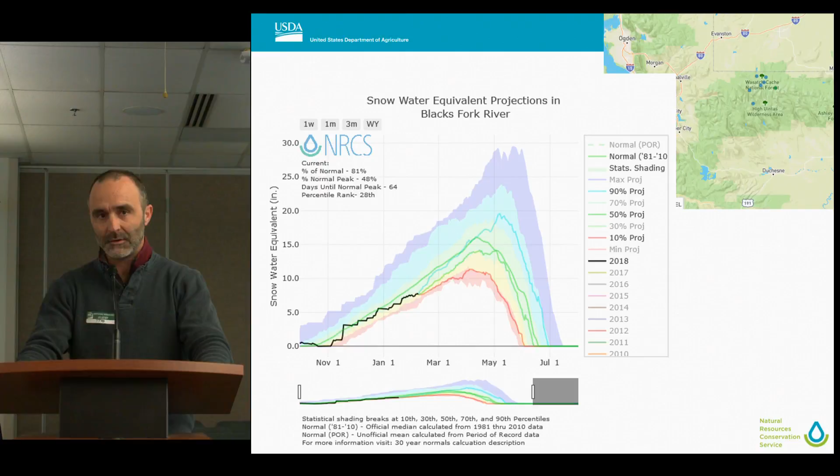We're getting good snow up there from the storms coming in, but they're just not reaching down into Utah. So a large part of that basin doing well is due to those Wyoming sites. The Black Fork Junction, or Blacks Fork River area, which is basically the north slope of the Uintas, is at about 81%, and that stands about a 20% chance of reaching normal by April 1.

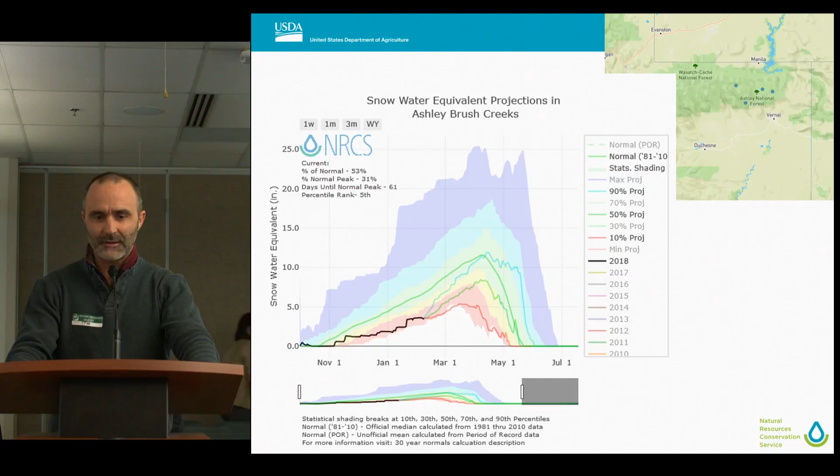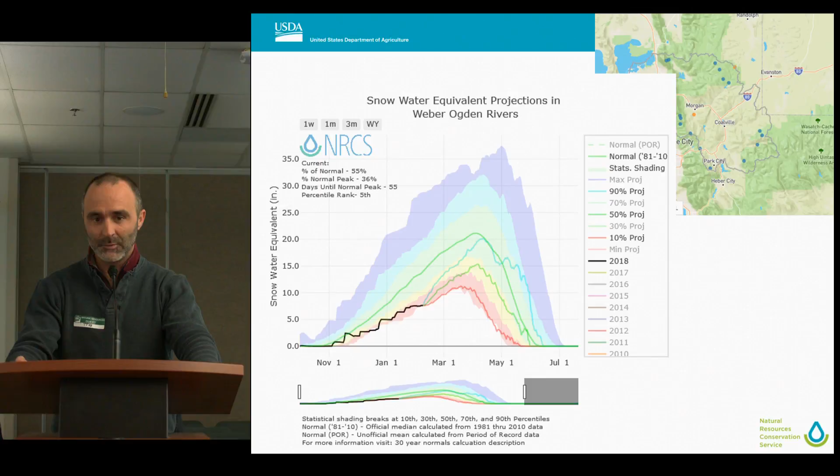Ashley Brush Creek, above Vernal on the east side of the Uintas, is doing much worse at closer to 53% of normal, with less than a 10% chance of reaching normal snowpack. As we go into the rest of these basins, you're going to see averaging 55% and lower, with basically a less than 10% chance of reaching normal snowpack. Weber Basin is sitting at 55%.

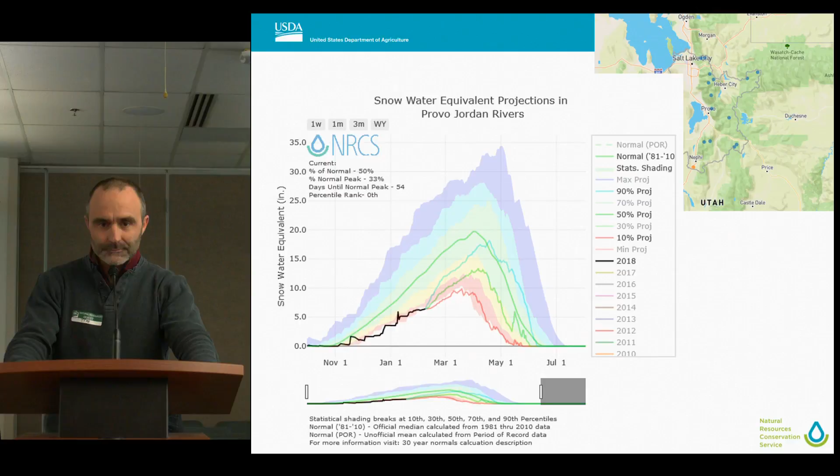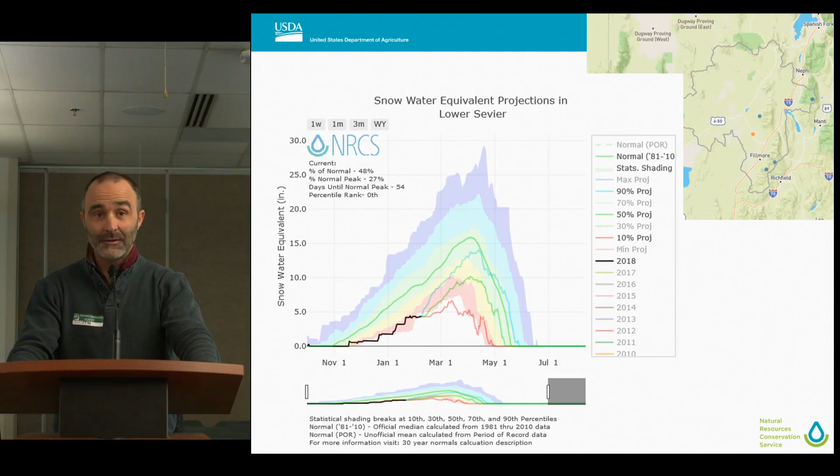The Tooele Valley is at 47%. Provo Jordan is at 50%. Duchesne River is 55%. Lower Sevier is at 48%. And now we start doing worse. We're going in at 36% for Upper Sevier. Beaver River's at 31%. San Pitch River is at 40%.

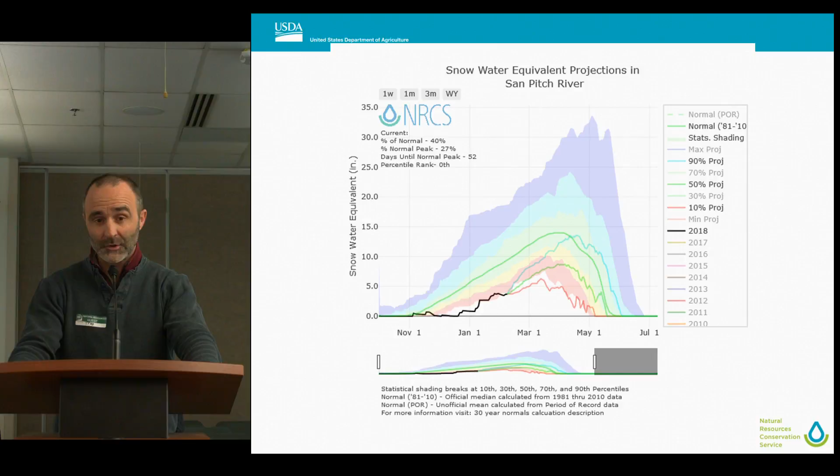36% for Price San Rafael River Basin. Dirty Devil's at 48%. Southeastern is at 37%. Escalante is at 32%. And the Southwest is at 32%.

So that basically sums up our snowpack. We're doing really poor as far as accumulating snowpack this year.

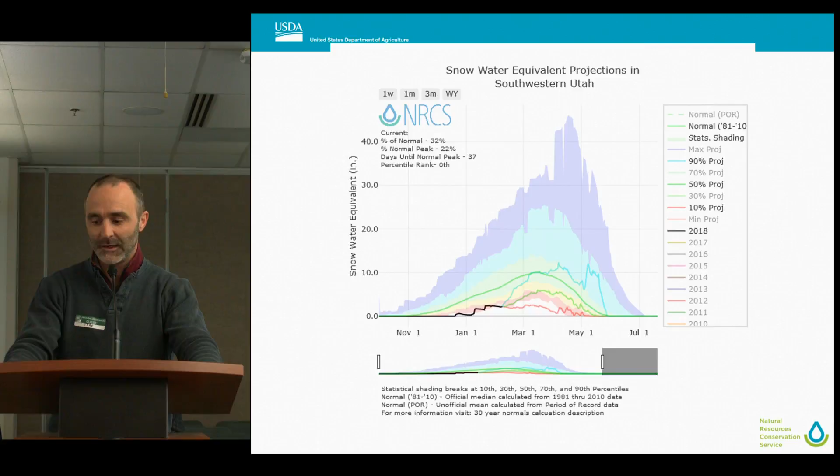January 1, we had some basins that were record low. When you look back at the snowpack records that we have, which go back to the 1920s, we saw some improvement even from just two storms in January, which brought it up from the worst snowpack to the second or third worst snowpack. It'll be interesting to see what happens for this month of February. The outward projection for the next 2 or 3 weeks is not good, so I anticipate that by March 1, we may again be breaking the record for the worst snowpack on record.

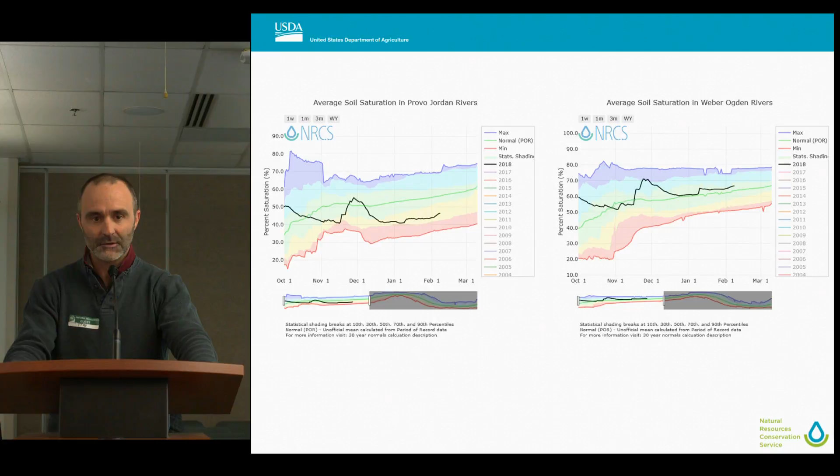So you're really looking at soil moisture down to 20 inches in the mountains. As we work our way down south, we start seeing soil moisture dropping a little bit in Provo and Weber. Provo is below average, and Weber's right along close to average. As we go further south in the Lower Sevier and the San Rafael, you see the soil moistures dropping there, and then the Upper Sevier and Dirty Devil. Dirty Devil's in record-breaking dry soils.

Now, why this is important is because with drier soils, that will make the runoff more inefficient. So a lot of the water, as it melts out, will be absorbed by soils on site until they get fully saturated, and then you'll start seeing runoff into the rivers and then into the reservoirs.

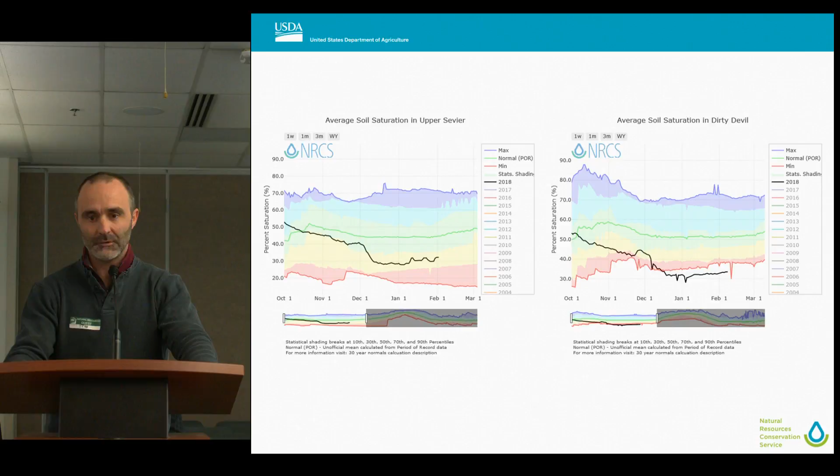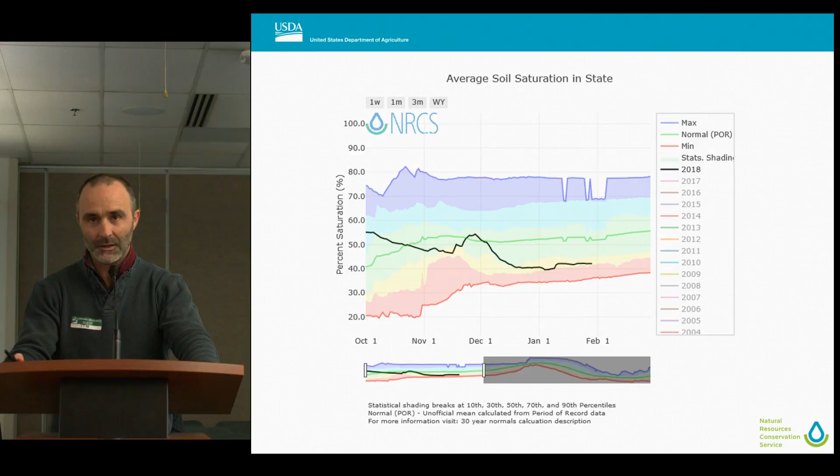Southwest and Escalante are both close to record-breaking dry soils down there too. So on average, for the state, soil moisture is below average. This is another nail in the coffin, so to say, where we can expect an inefficient runoff as well as a below average runoff for this water year.

So let's sum it up. The Bear River and the Uintas, the North Slope Uintas, those are our two decent basins. They're doing okay, at 81%. They still currently stand at about 20% chance of reaching a normal snowpack. When we work our way down south, the Weber, Duchesne, Provo, Lower Sevier range in between 50 to 55% of normal. For the rest of the basins down south, we're looking at 29 to 45% of normal.

So pretty much all these basins, aside from the Bear River and the Uintas, have a 10% chance or less of reaching a normal snowpack by April 1. Our forecast on February 1 up north, within the Bear and the North Slope, the forecasted flows are estimated between 55 to 88% of normal. Then we look at the mid-north, which includes the Weber, Duchesne, and Provo—those ranging typically from 50 to 70%. And the south is ranging pretty much from 30 to 50%.

There are some forecast points that are as low as 6%, and some ranging 60 to 70%. But on the whole, across the state of Utah, the river flow forecasts are all well below normal or average stream flows.

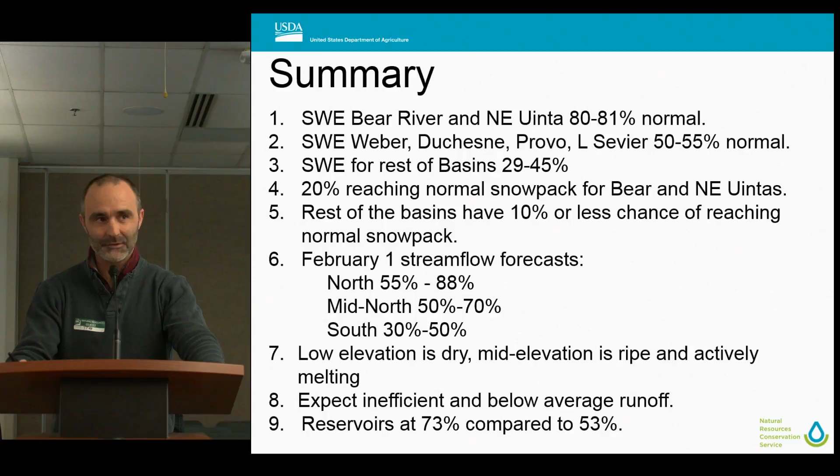So one would ask, where's the snow? It's not here in Utah. It's mainly up in Montana and Wyoming, north of us. That's all I got. I'm sorry I can't bring better news.

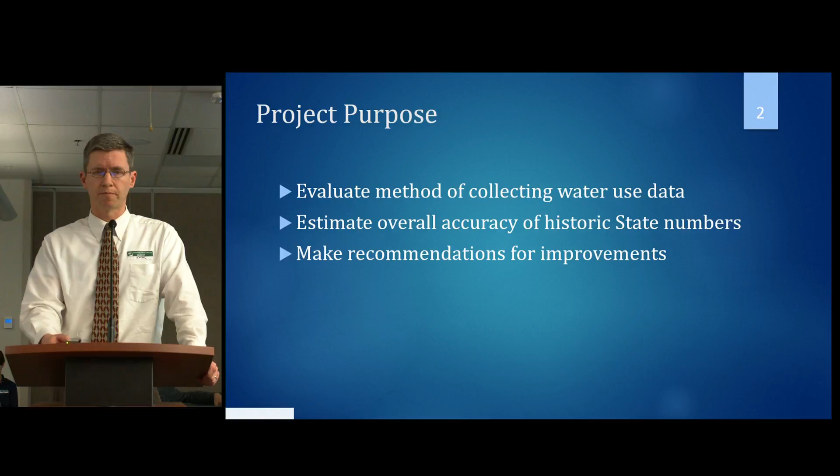In terms of how we attacked this task, we did a couple of different things. First, we spent quite a bit of time doing interviews with the Division of Water Resources staff and also the Division of Water Rights staff. We also got out and did some interviews with some of the water providers that are turning in data for this data collection process. Once we had that, we looked at your water use database and all available documentation.

Last, we went out and did a detailed survey of different entities. We wanted to capture both a broad range of use as we could, but then also get in deep in a couple of areas. To do that, we looked at 3 large water districts: Jordan Valley, Weber Basin, and Metropolitan Water District of Salt Lake and Sandy. Those 3 districts comprise about 50% of the water use in the state. So by looking at those 3, we're able to get a pretty broad indication of accuracy.

But then we also wanted to look at some smaller retail water providers and really get into the nitty-gritty of how the data was being collected. One of the questions that has come up is, why should we believe your numbers, Bowen Collins, Hansen Allen Luce, any more than the Division of Water Resources?

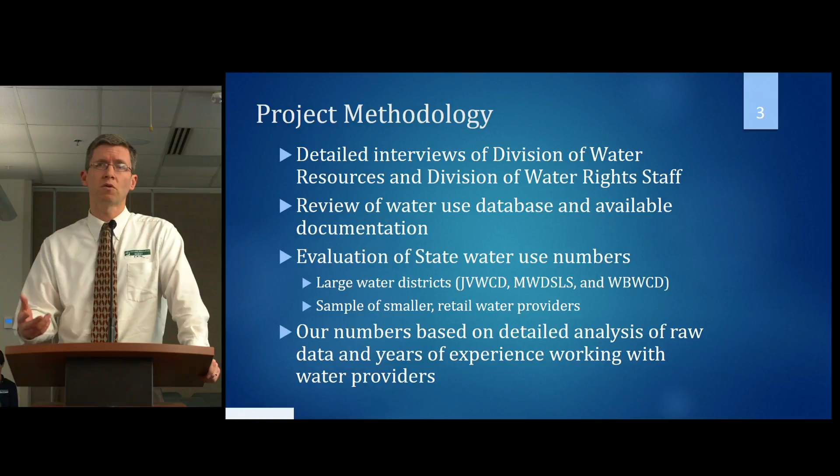So with that in mind, what did we find? Hopefully we have a little bit of good news here, maybe a little more than Troy was able to bring you. First of all, potable water use data is quite accurate, and it is getting better. That is where we spend a lot of our time, and that's where Water Resources spends a lot of their time. What we found is they've done a really good job at getting that information and getting accurate numbers. We'll look at that in just a little more detail.

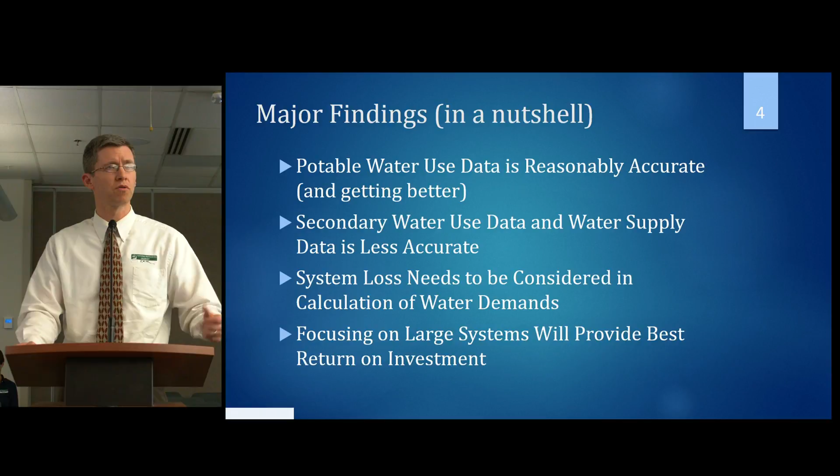But in a nutshell, the other things that we found: secondary water use and water supply data is less accurate, and there are some reasons for that that we'll talk about, and some things that we can do to improve that. We also found that system loss needs to be considered when you're calculating your water demands, and we're recommending that you focus on the large systems to provide the best bang for your buck, or return on your investment, as you seek to understand water use patterns.

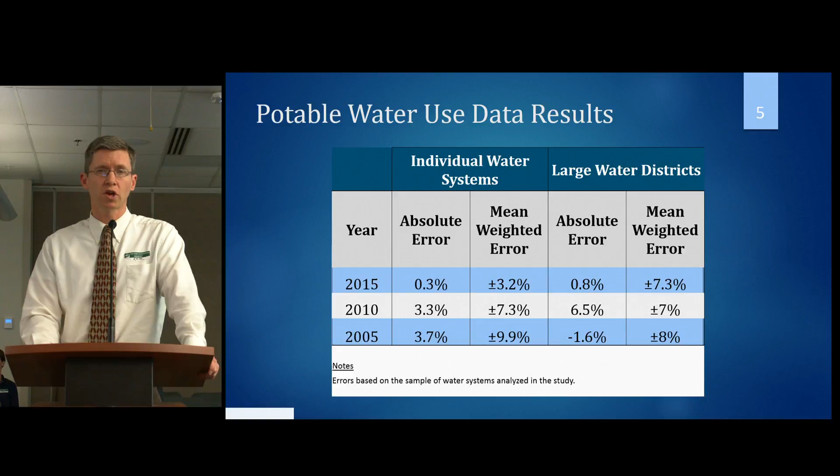You can see that it's also improved over time. From 2005 to 2015, we've generally seen a reduction, so those are getting better over time.

We identified in our report 17 different things that could be improved in the methodology from the 2015 process. As we looked at what's happened in the last two years since the audit, out of those 17, 7 have been completed already, 7 are in process, and only 3 remaining recommendations still needed to be started. So already since 2015, staff has started to make a number of improvements.

This slide, I think, is really illustrative of the effect of that. Basically what you see is a lot more systems reporting. Only 2 systems that we were able to identify had not reported in 2016. So really the process, even from 2015, is getting better and better.

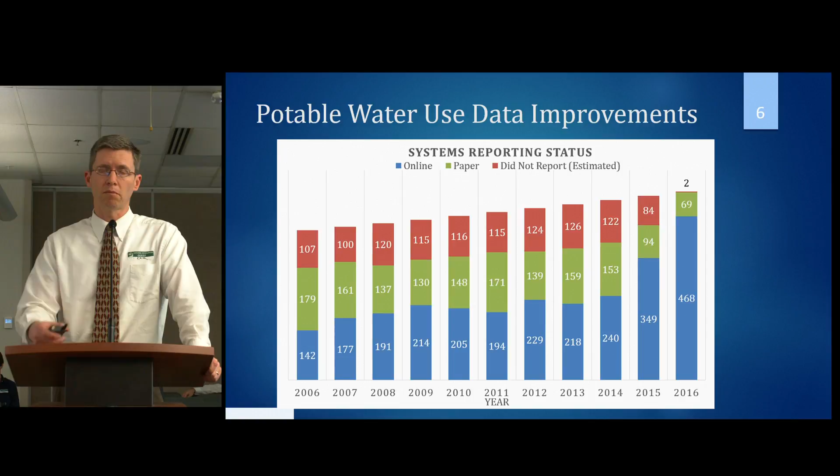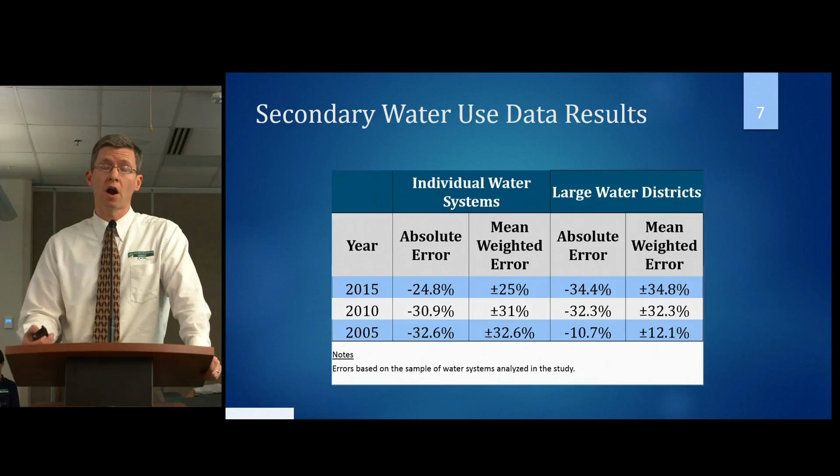On the secondary side, what we found is that we were not quite as accurate. In general, we're seeing an underestimation of what our numbers were showing in terms of secondary water use. There's a couple of reasons we think are contributing to this.

One is an oversimplification of lot size. In the 2015 draft, secondary was created by multiplying an estimated lot size by an estimated application rate. What we're seeing is that lot size was oversimplified, and we weren't getting accurate data relative to lot size. We also noticed an underestimation of application rates.

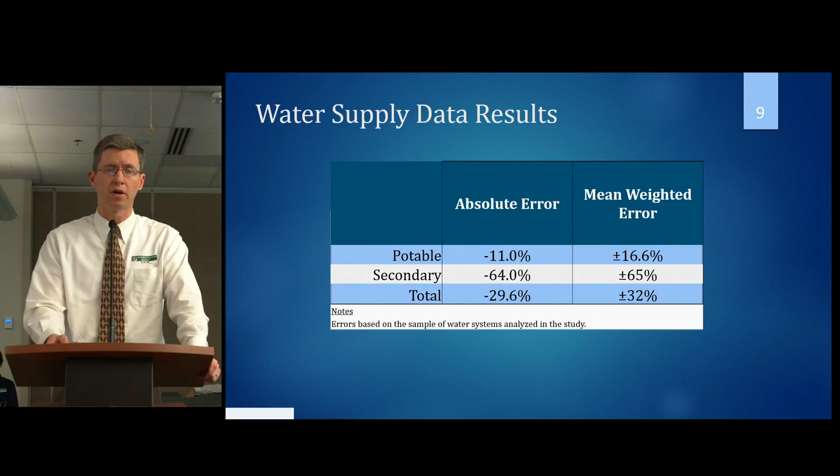So overall, in summary, potable water use numbers look great. Secondary and supply are a little bit underestimated.

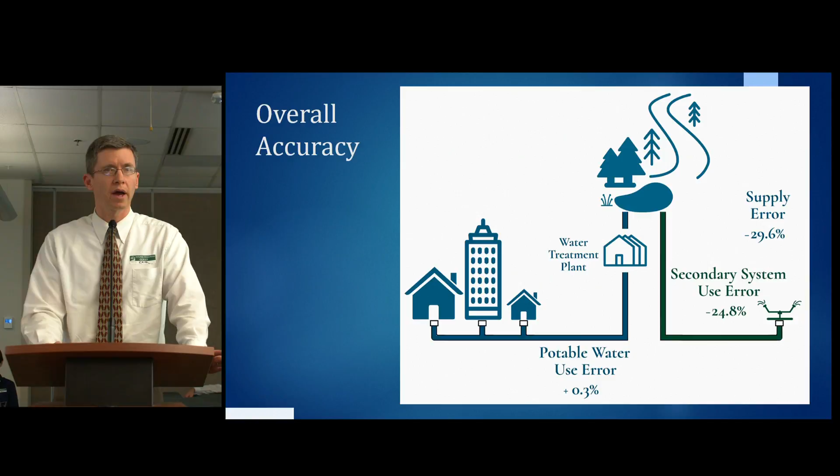One of the other conclusions we made was that system loss is something that has not historically been represented and needs to be represented. You are all familiar—you have a supply that goes to a house, and thus far our focus has been on metered use. What we're finding is that metered use only represents about 85% of total water consumption on average.

That's an average number—some systems can be much higher than that. We found systems up in the 30-plus percent range, but that represents leaks, unmetered use from things like fighting fires, construction water, and application to public properties that are sometimes unmetered.

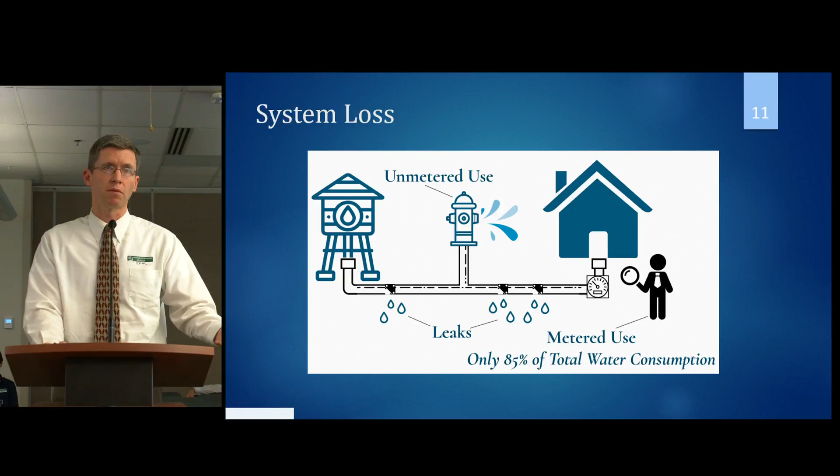So there's a difference, and that needs to be included. The last big conclusion we had was that there is definitely a difference between large and small systems in terms of your overall numbers. Large systems, in this case we've defined that as systems serving more than 5,000 people, you have 18% of your systems, just under 100 of the 500 systems in the state. Those result in 88% of the water use. The other 82% of the systems, the small systems scattered throughout the state, only result or are only responsible for about 12% of the water use.

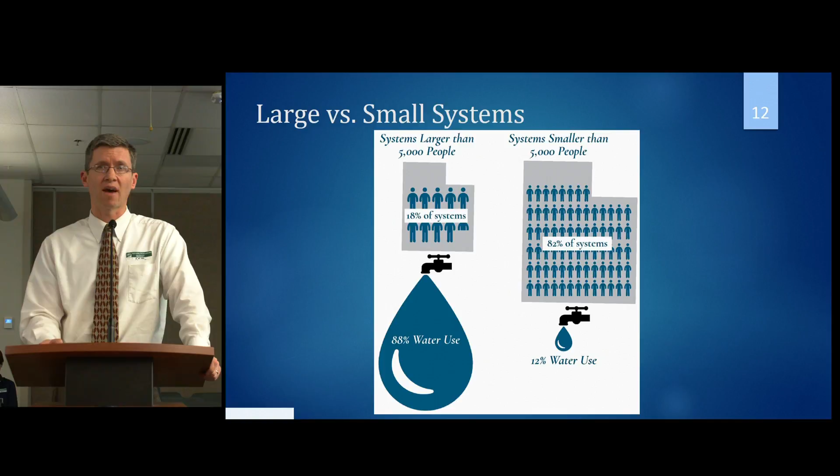And so as a result, if you want to focus on getting your numbers as accurate as possible, you need to make sure that those large systems are giving you good numbers. And the small systems, if there's a little bit of error in those, that's not going to have as big effect on the total number.

Okay, so to wrap up, what are our recommendations? Number one, continue your current trajectory of improvement in data collection. As mentioned, we've seen major steps forward since the 2015 audit. If you continue that direction, we think you're absolutely on the right path.

We'd recommend you add consideration of system losses into the calculation of demands. In the short term, we're recommending adding 15% to your current estimates. In the long term, we're recommending, and we recommended this to the legislature, that you require AWWA M36 water audits in the future so that systems have a little better idea of what their actual system loss is.

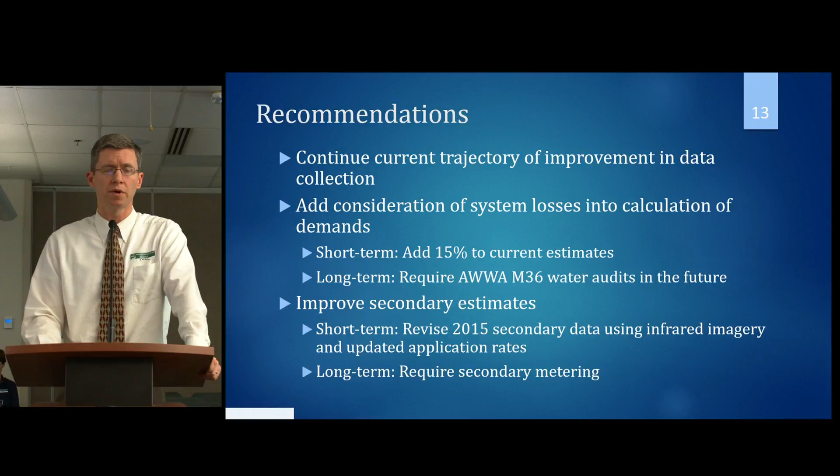In the long term, and this was really a big thing that the legislature wanted to talk about, was requiring secondary metering, at least for your larger systems, so that we have both better numbers and we also have some ability to encourage conservation.

And then the final recommendations for supply, we're recommending that you have your systems do a detailed supply analysis to provide to Water Resources so they can improve those numbers. And then focus your efforts on the large systems, especially those larger than 5,000 persons.

Last thing is we were asked to provide a recommendation regarding what baseline number we would use for future planning, and we're recommending the 2015 estimates of Water Resources with the few updates that we've identified here.

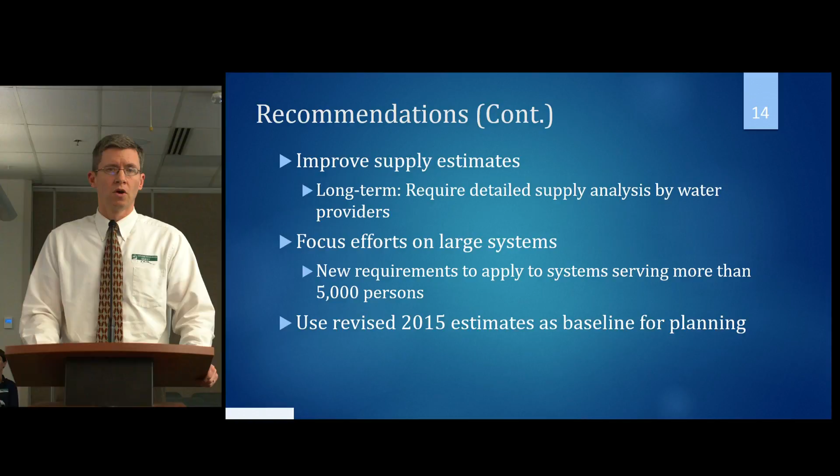And then this was for legislative actions. We did make these recommendations to the legislature: secondary metering, AWWA water audits, and supply evaluation plans, especially for those larger customers.

So with that, we'll open up to any questions.

I have one. Could you go back and maybe do a little bit more detail of what is required in an AWWA M36 audit? Sure. Either you want to take this one? I've been talking a lot. I'm Dr. Rob Sowby of Hansen, Allen and Luce, by the way.

AWWA has come up with a standard method for auditing water loss in systems. It includes calculation errors, thefts, apparent losses, fire flows that are unmetered, construction, etc. And that's a standard method that can be applied to any size water system. Many Utah water systems are already doing this. I know that Central Utah Water Conservancy District is already implementing this kind of audit, and that's something that we would recommend as a standard practice for, especially for large systems.

Okay, thank you. Essentially, you're just stepping through all of your different potential water uses, whether metered or unmetered, through a defined methodology to identify loss. Additional questions from the board?

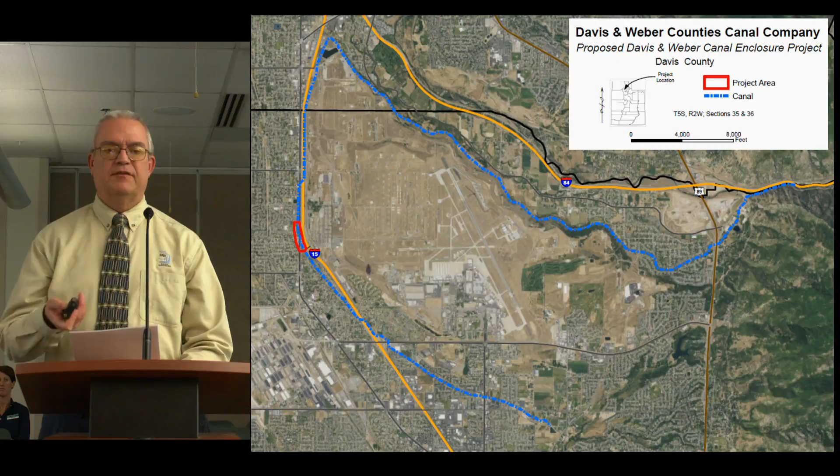The applicant plans to improve the remainder of the canal over the years as funding opportunities become available, and they have a long-term plan that breaks out specific sections, prioritized for further improvements. They're currently enclosing about a 950-foot section of the canal, shown on the map here. You can see where the off-ramp from the freeway is, and it's from that point up to where the canal goes under State Road 126.

They also have a WaterSMART grant application that will allow them to enclose another about 3,600 feet of canal this coming fall and winter. The applicant is before the board today to request financial assistance to enclose about 1,200 feet of the canal from where it goes underneath State Road 126 up to the parking lot you can see.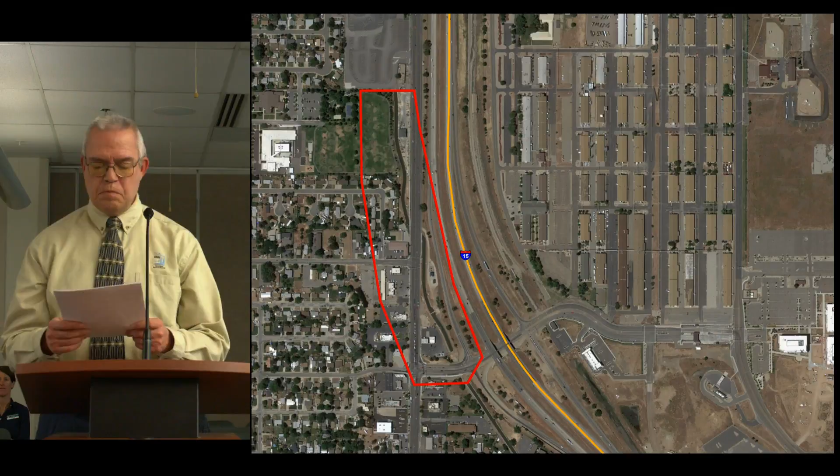The concrete liner in this section was installed in about the 1920s, and there's considerable deterioration occurring. You can see where a lot of the sections have been broken out, looking south towards State Highway 126. Here's a closer view of a couple of sections where the liner has failed.

The project benefits primarily include increased safety since it will be an enclosed canal, improved water quality because the garbage—you can see tumbleweeds and everything else in that picture—will be kept out, and conservation of over 300 acre-feet of water annually. It will also reduce the operation and maintenance cost a little for the company.

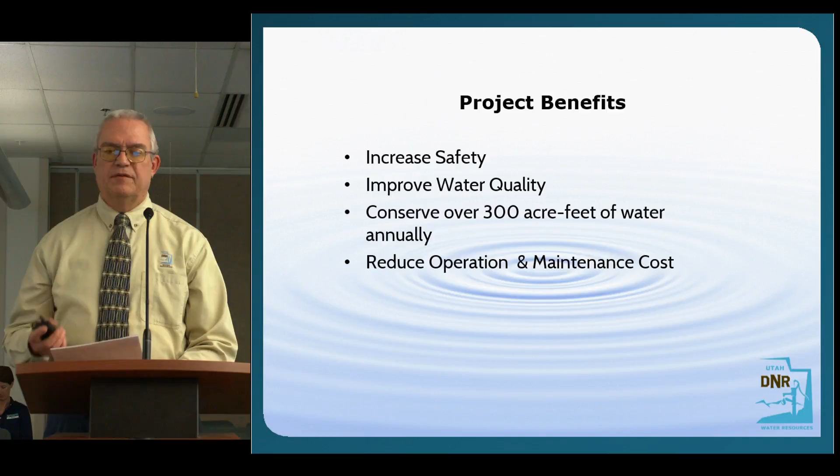The projected project cost is $1,325,000. They are getting some money from UDOT to help pay for the crossing underneath the highway. It's proposed that Water Resources authorize and commit at this time 73.6% of the project cost, up to $975,000, with the project purchased at 0% interest over approximately 20 years with annual payments of $48,800. Just an explanation about the terms—they're getting 0% interest because it's under $1 million, so it can come from the revolving construction fund.

And since it's mainly a safety issue, we're giving them an extended repayment period of 20 years. So that's just a short explanation on that.

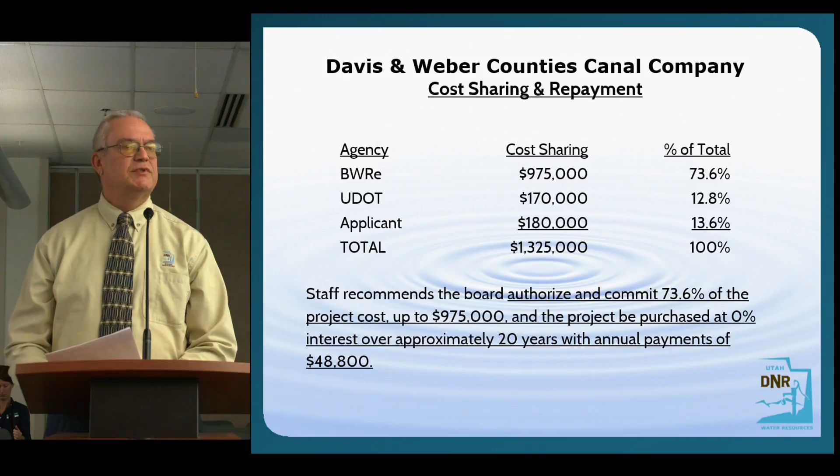The project is ready to start any day because when they put the bid out for that original 950 acre-foot improvement that's going on now, they also bid out this section in anticipation of the project. So they're ready to go. Mr. Chairman, members of the board, that's staff's report.

Thank you, Tom. Rick, Scott, Bryce, would you like to make comment on your proposal? Well, I think it's been explained very well. Tom's done a great job. We just appreciate the consideration of the board in this. It would really help us out in stretching our reserves for other projects. Thank you.

Okay, questions from the board? Motion is in order, Mr. Chairman. I'm ready to make that. I've had the opportunity to meet with this group and did a site review with staff on it as well. So I would make the recommendation that the board authorize and commit 73.6% of the project cost up to $975,000, and the project be purchased at 0% interest over approximately 20 years, with annual payments of $48,800.

Thank you for the motion. I'll second it. Steve Farrell makes a second to the motion. Any further discussion on the motion? If not, all in favor of the motion, say aye. Aye. Any opposed to the motion? Motion passes. Thank you, gentlemen. Thank you very much. Appreciate it.

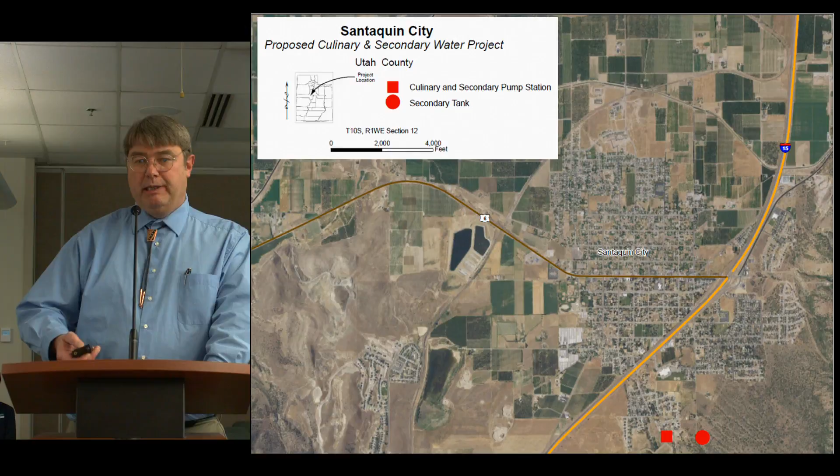They're going to share one building, but have separate pump stations on their own. There's a few pictures of their existing system. Here's a photograph, map of where they're proposing the pump station to go, again on the east side of the city, up on the hill. A new secondary water tank or reservoir will be up by one of their city culinary tanks.

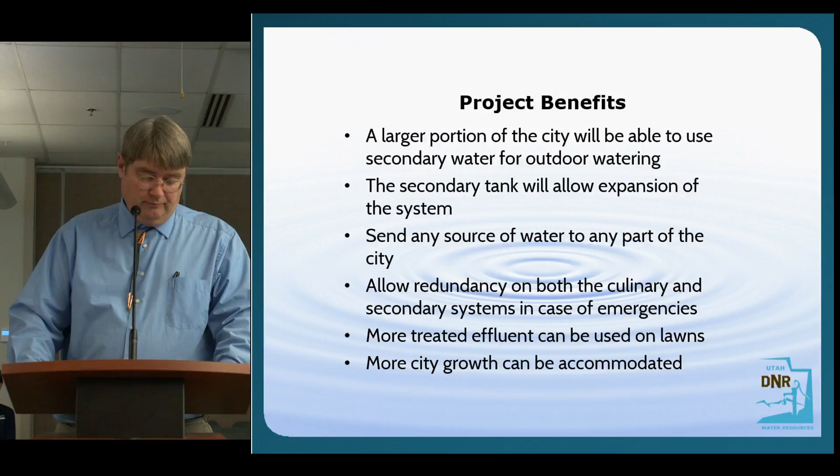As shown in the cost estimate, the cost is estimated to be about $4,048,000. As shown, the board is being requested to fund 85% of this project, or $3,441,000. Staff recommends the board authorize and commit 85% of the project cost, up to $3,441,000, and the bonded indebtedness be returned at 2% interest over 20 years with annual payments of approximately $223,000. The financial feasibility shows the city would be above the board's affordability guideline with this project.

And the city currently has fairly aggressive tiered culinary water rates, and the city is currently discussing putting tiered rates on the metered secondary water and lawn and garden system. And that is staff's report.

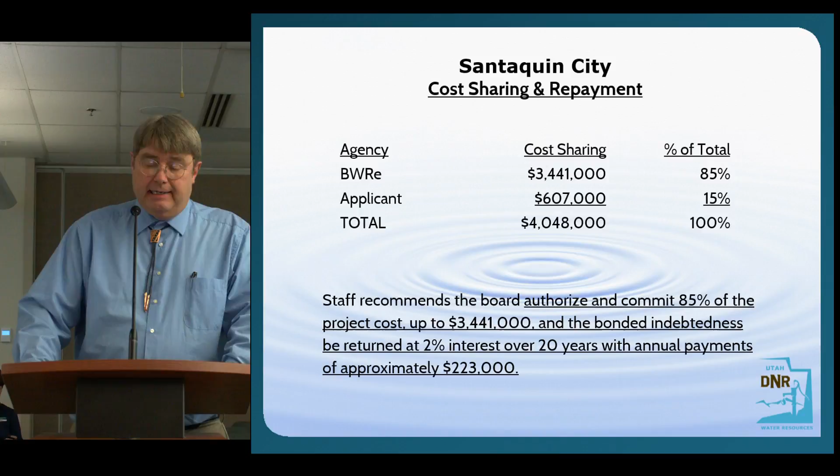Mr. Mayor or Mr. City Manager? I'd love to. Thank you for entertaining our project today. That water treatment plant project was a hard sell in Santaquin. The elected leaders went through a lot to get it done. It was a previous mayor and the council then, but we are so grateful for their efforts in doing that and being able to have this system that we have now and being able to use our treated effluent. We want to expand. The growth is coming south. Santaquin's seeing that growth, and we need to be prepared for it. And anyway, we thank you for your consideration.

Thank you. Questions from the board? Yes, Norm. Having been a city manager myself, I'm just a little curious as to how you think it's going to be received if you do start charging on a tiered basis for your secondary water. How's that going to fly?

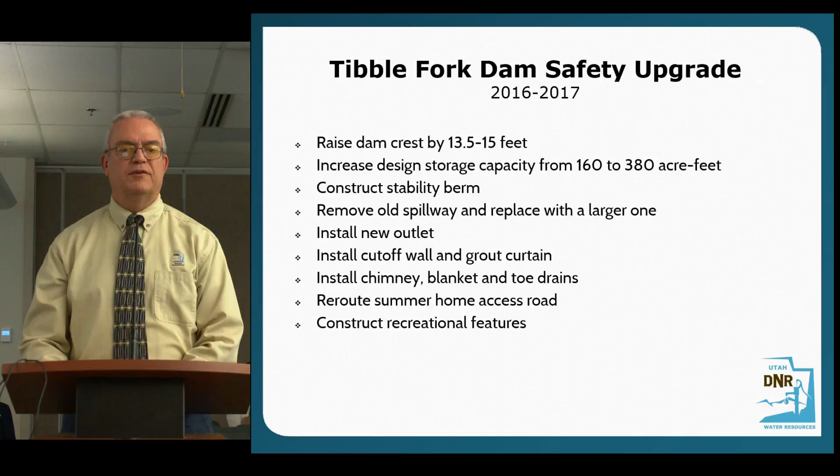Install chimney, blanket, and toe drains, reroute the summer home access road that used to run right across the crest, and construct some additional recreational features.

So the total project cost, this is just the construction cost sharing, was just about $8.3 million. NRCS put in 65% of that, plus 100% of the engineering, like Eric mentioned. We put in almost $1.851 million, and that was just for the dam safety features. It didn't include costs for any of the recreation, didn't include any of the costs of raising the crest, because we could only pay for the minimum standard upgrade on the existing facility.

So we ended up only paying about 22% of that total construction cost. And although it was available, the district did not utilize any of our loan funding for the project for their cost share.

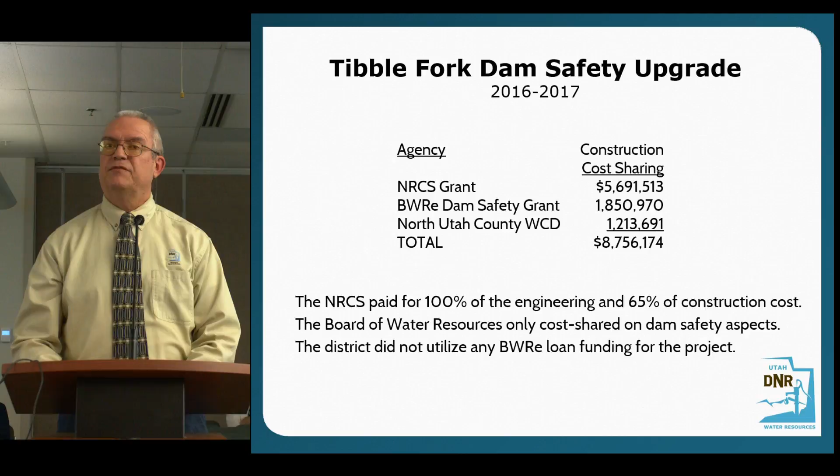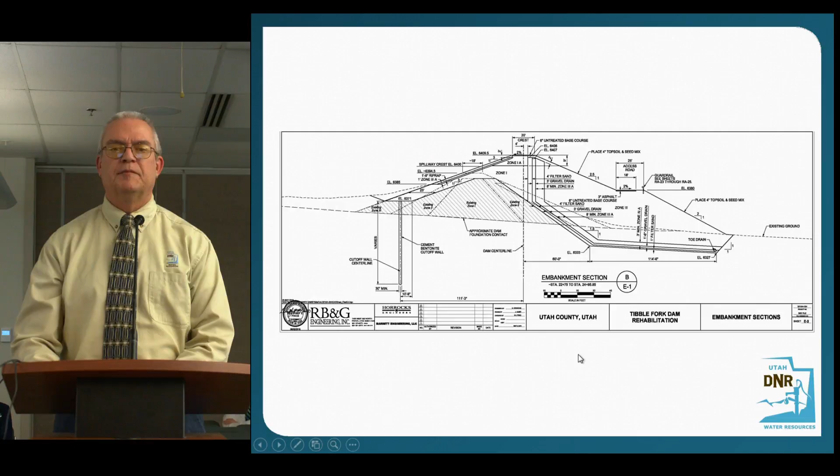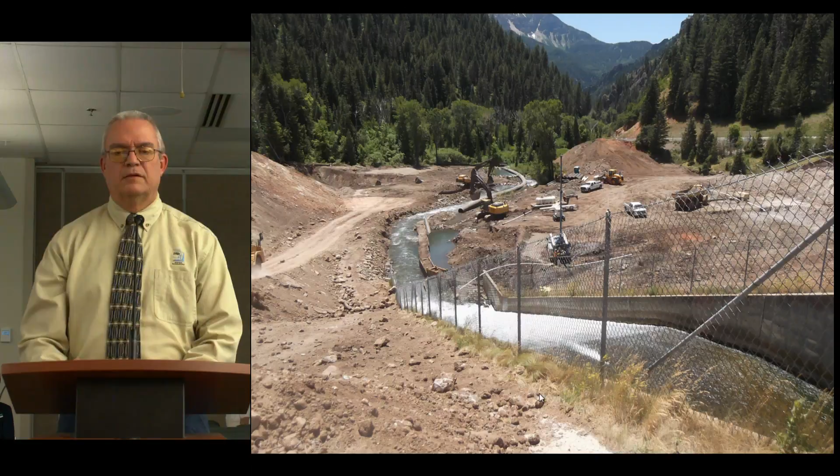So this is a shot of the original spillway. You can see they've already done some clearing and grubbing at the toe, and you can see it's an HDPE pipe that they fused together to hook onto the end of the spillway to control the flow while they did the work.

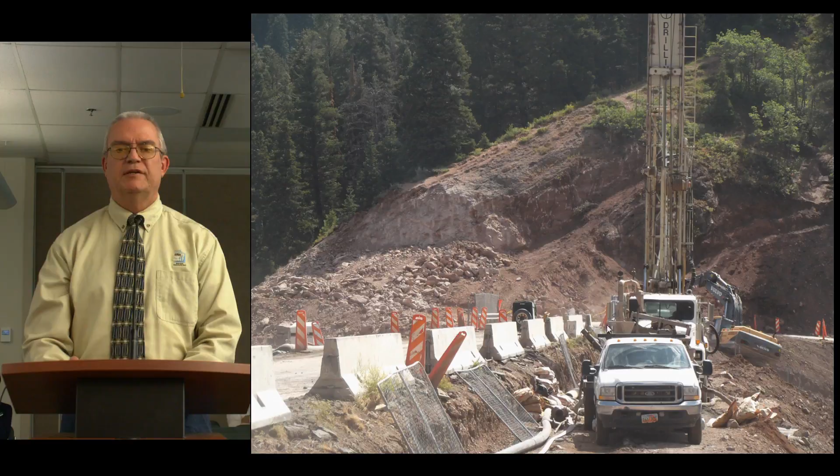First thing they had to do was put in dewatering wells so they could dry up the area so they could excavate down at the toe of the dam. So there's one of the drill rigs. They've already started clearing off the left abutment where they will put in the grout curtain.

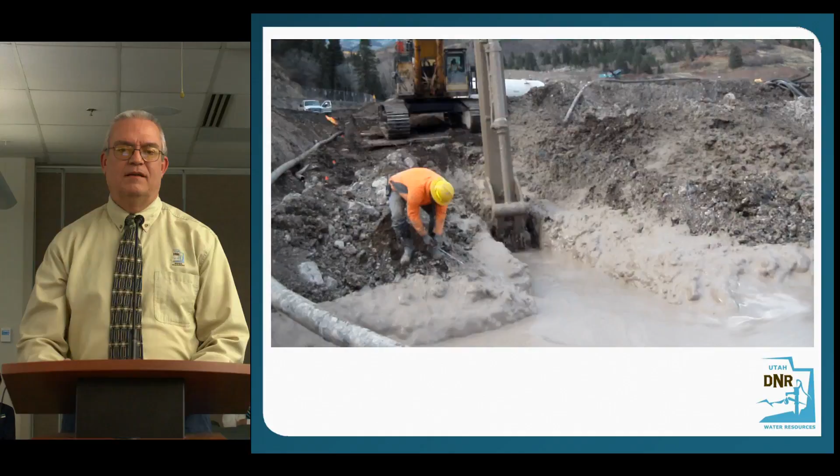So what he's throwing in is a weight, so you can measure the depth of the trench at that point. And it was probably only 30 to 40 feet deep at that point - they had passed the maximum point.

You can see all the teeth on the back of the bucket, because if they ran into something hard, they had to just work their way through it. And they did find some boulders and things they had to work through.

I don't think there's much left on that video.

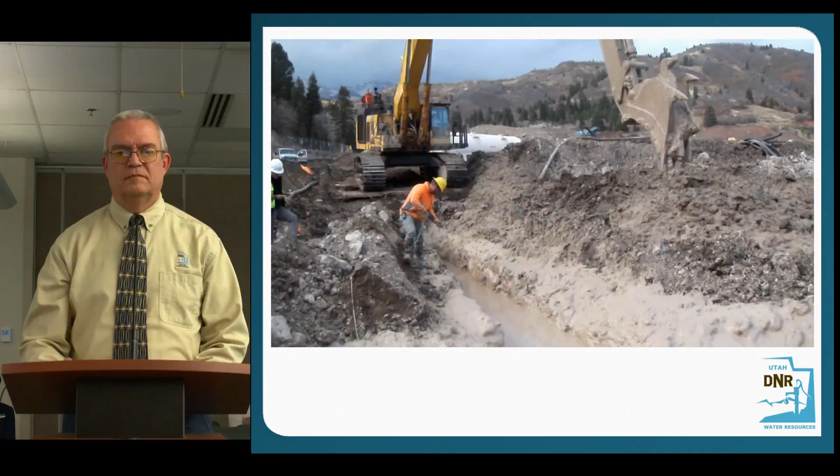This is the end of the trench where they started. You can see the excavator in the background, but it's already starting to set up. They actually went in after it was mostly set up and put in kind of a harder cap on it. It wasn't pure concrete, but it was harder than this.

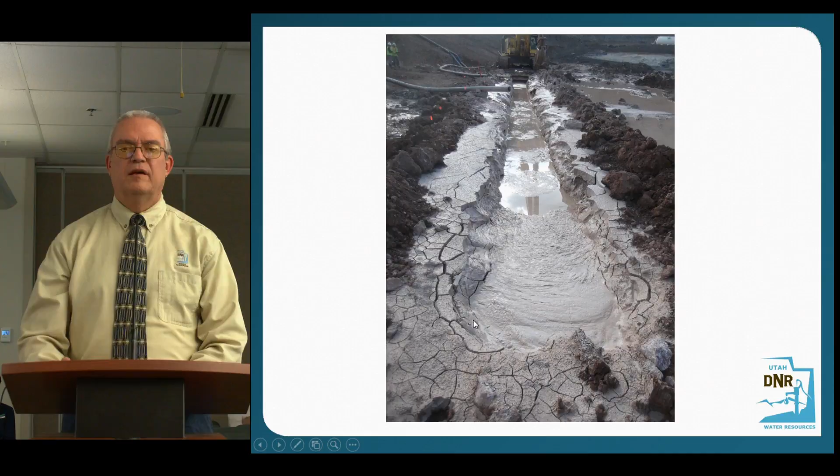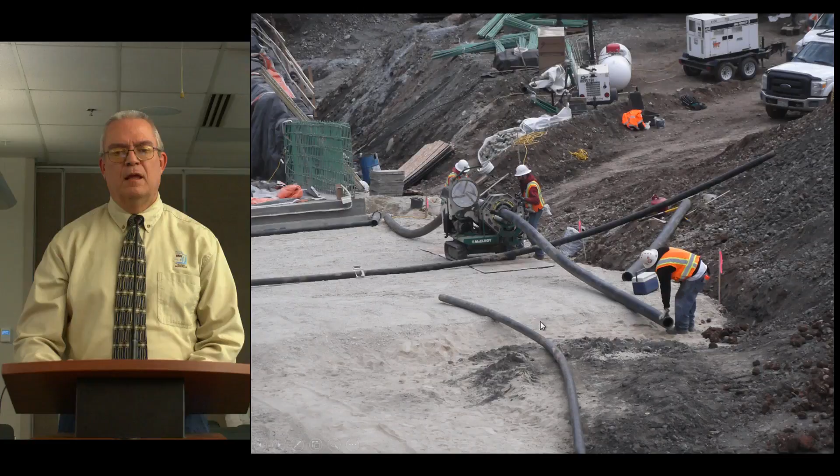The toe drain was made out of slotted HDPE pipe. Here's a picture of them fusing the pipe together. There's the drain that runs along the toe up the downstream groins, and then they put in drains along both sides of the spillway and a cross drain wherever there was a construction joint in the spillway.

There's more work on the spillway, and the weather is getting cooler. You can see the leaves are turning, so they have to keep the concrete covered as it cures, and keep the ground ahead of it covered so it doesn't freeze. Just another shot.

This is the new outlet. It was steel pipe wrapped. This little tent was kept over the area where they were welding, to keep it out of the weather.

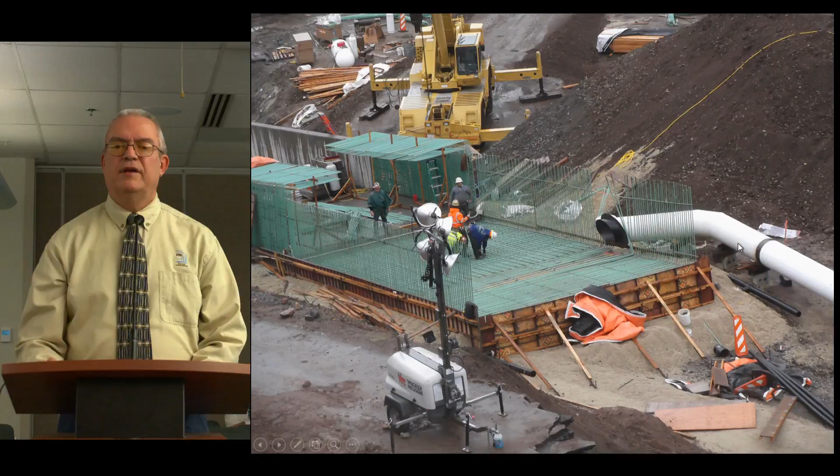The outlet discharges into the new spillway, so that's where it enters the spillway structure. Here they finished the rebar for the concrete encasement for the spillway, and they're putting up the forms for that.

Just a shot of the downstream. I probably didn't point out on the plans that the chimney drain followed the slope of the old embankment, but then had to leave it and go vertical. So this is a shot where the chimney drain is going vertical, with the embankment fill between it and the old embankment.

They kind of used this jig after they got going. They could put the filter material on this side, the drain material on that side, and just drag it along, and it would place the drain material.

Just a picture of it actually in use. It's up there - they have the front end loader to fill it, and the track hoe to drag it along.

So this is the dog leg portion, and this is the main dam portion. The spillway - you can see how tight quarters they had to put in compacted fill in the drain along the hill there also. Here you have the dissipation blocks down at the bottom of the spillway.

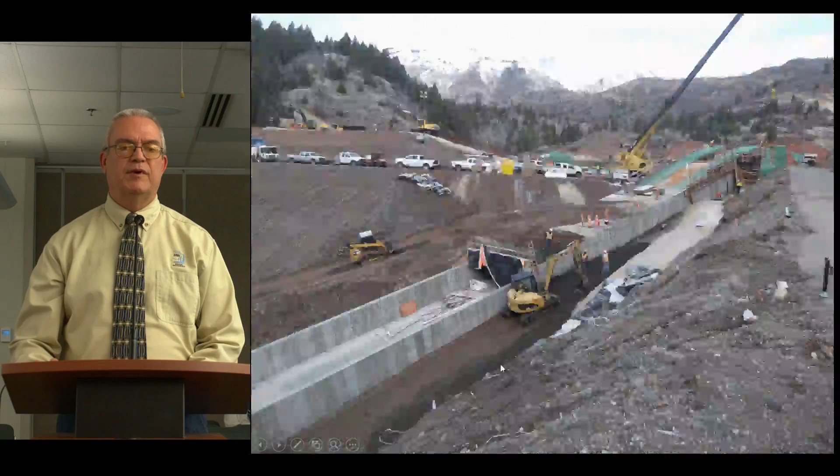At one point where the stability berm crosses the embankment, they had to enclose the spillway, so it's box culvert from there up to the top of the dam. Just a shot - this is the end of the spillway, the chimney drain. The dog leg is pretty much up to grade.

This is when they did the outlet in two parts. The one part went up to that temporary ramp for the drill rig—that was the first part. Then this was the extension after they took that access ramp out, and they're placing the concrete in the outlet enclosure that day.

Once again, they're keeping the ground covered so it doesn't freeze, because they did get some cold weather there. There's snow—what's that white stuff? Haven't seen much of that this year.

So they have this tented. They're underneath there tying the rebar for the spillway slab floor, and they need to keep it warm. So it was a nice toasty place to hang out on the cold day.

Here's the new inlet structure to the outlet pipe with the air vent. They had hydraulic controls.